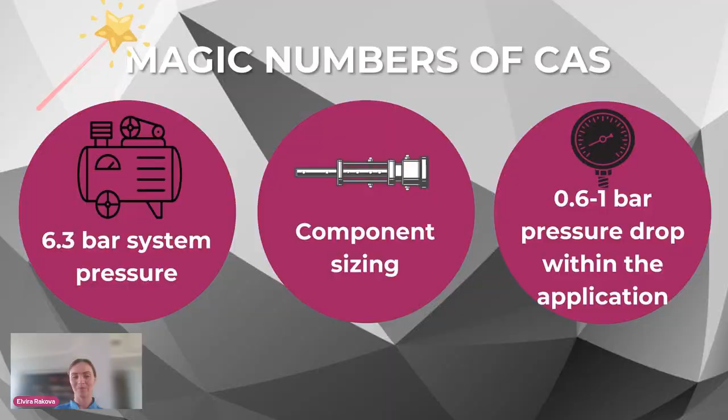Just to refresh a little bit the basics of compressed air: when we talk about, for example, 6 bar of compressed air, it means we take one volume of 1 cubic meter and put in there 6 times, 6 cubic meters. So this is 6 bar compressed air. We always work there with volumes and with pressure.

Why does this magic number matter, why does 6 bar matter, why does the sizing of components matter, or the pressure drop? Because this actually creates part of the energy consumption, or your energy bill that you pay, and also affects system performance. Our energy consumption depends on the pressure level that we supply to the system, plus the pressure drops that occur in the system, even if we have a perfect system, times the filling volume.

Filling volume is all the volume that we need to fill. It's the geometry of the cylinder, for example. It's all the dead volumes that we have, the flow in the application where we need the flows, all the tubing, and so on. So this is basically our system performance. We always work with pressure and with the filling volumes.

Since we don't work with temperatures there and we have a standard temperature, we likely ignore this factor in our energy consumption consideration. However, it has some impact, but not a big one.

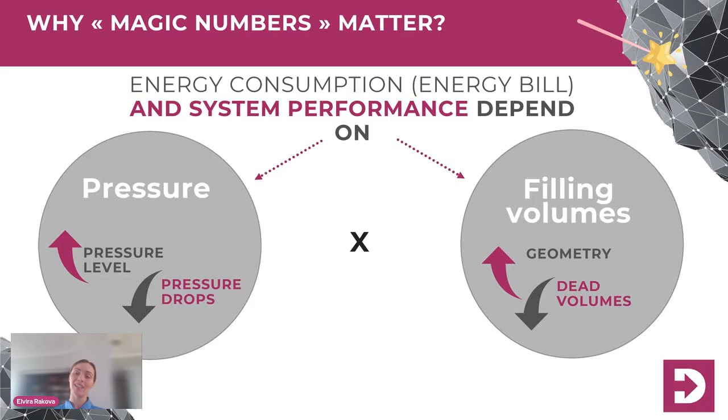The first magic number I would like to discuss and unveil today is the pressure level of the system, 6.3 bar. I put a magic ball here for a reason, because I was always asking why it is 6.3 bar. While working in the lab, every time I turned the pressure regulator to 6.3 bar, I was waiting for something to happen, because it's everywhere, it's written 6.3. Not 6, not 7, not 6.5. There is something mysterious in the 6.3 bar.

So how did I start my journey looking for the technical explanation of this? First, I did a questionnaire of the maintenance managers and also the suppliers of equipment, suppliers of compressors, auditors, and everyone confirmed this is the best practice, this is our baseline, this is the standard. Whenever a system would work under 7 or 8 bar, everyone would say we need to reduce it to 6.3 bar at the machine.

The next question about 6.3 bar, I asked the suppliers and auditors, and they also confirmed this is the best practice and recommended by manufacturers. And third, of course, I checked with manufacturers and they confirmed the same.

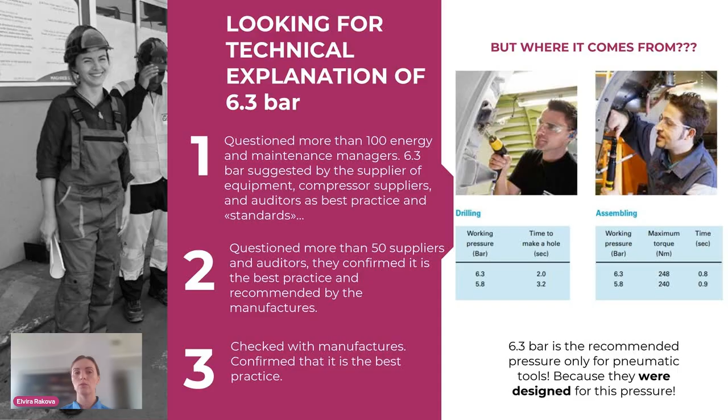So once again, we have here one certain application of compressed air, just for pneumatic tools, and they use 6.3 bar to perform it. Then they said you have pressure drops in the system, and maybe the compressor unit is at 7 bar. So my question was again, why were those systems actually designed for 6.3 bar? I'm waiting for the next slide to show you on the screen. Here it is, and here's another interesting historical background.

6.3 bar is 90 psi, because we use the SI system, right? In the US, for example, they would use 90 psi. 90 psi was chosen because it's a technically reasonable pressure that a compressor could supply, plus it's a pretty number. I've been told it's a pretty number, and if you translate this pretty number into bars, it's going to be 6.3 bar. This 6.3 bar was adopted in all countries, because this standard for those tools was first developed in the US. Then agree, it's a nice number, right, like 90, not too high, not too low, very pretty.

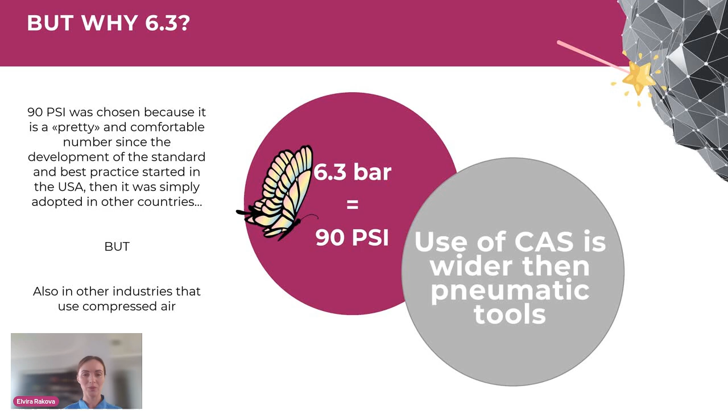Moreover, they were adopted not only in other countries but in other industries as well. So it means that the pneumatic tools, only for a few applications, this pressure level and standard, and this technical explanation, was also adopted in other industries.

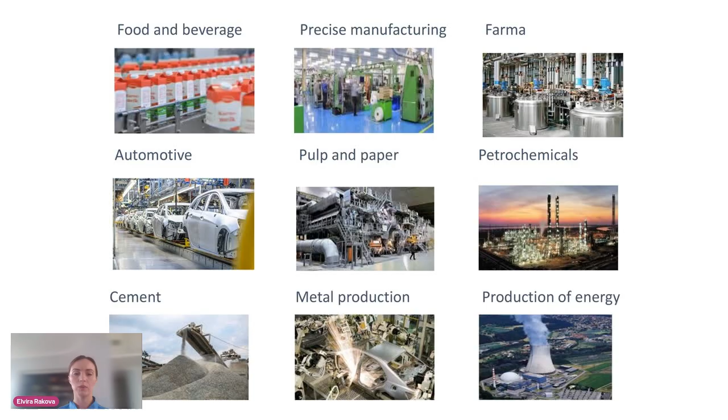But compressed air is more than just drilling and checking all these machine tools. We use pneumatics in food and beverage industry, in precise manufacturing, pharmaceuticals, automotive, pulp and paper, petrochemicals, cement industry, metal production, production of energy. I don't have all the applications here, but you probably know better than me. We also have woodworking machines, and various industries where we widely use compressed air, not only to fix holes with pneumatic tools. And those applications of compressed air can be technically divided into 4 types of application.

So the first type is, of course, the working air that we use in the automation. For each application, we have a certain equipment. So we have automation, we have the painting application for explosive areas. This is what we call working air. And there we have certain tools, certain equipment and components. We also use it as active air for material transport and also for bearings.

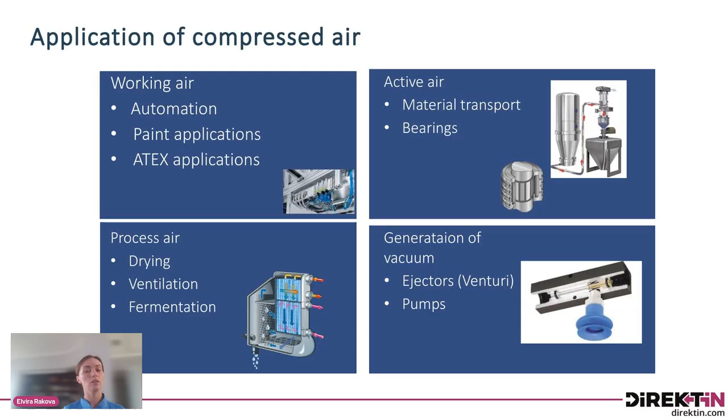In the process air, for example in the cement, in the chemical industry, for drying, for ventilation, for fermentation, and we also use it in the vacuum. So we can use it as ejectors, or we can use it as vacuum pumps.

So here we are actually beyond those drilling and assembling requirements or standards that were developed and adopted so many years ago. If we go a little bit backwards and question ourselves: do we actually need 6.3 bar at all for our application? Do we need this pressure level? Do we need pressure at all? Or maybe we need a high flow there? So those are the questions that I would like to discuss with you today.

I want to show you that there are standard ways to optimize compressed air systems nowadays. However, we need to follow better practices, and we need to follow a new way of thinking in the design of compressed air systems, as well as more efficient technology.

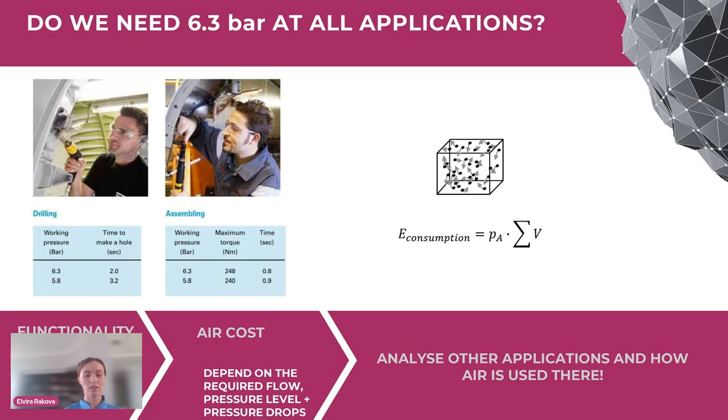So let's think together. We have the application of 6.3 bar for assembling, but what if we follow the same logic and go to all other applications that we have? We see, do we actually need those pressure levels, or what do we actually need for our compressed air system there? Let's go ahead and see how air is used beyond those applications.

Today, I would like to focus on just a few applications. This is mostly used in the working air - so basically the first type of application that I showed you, and also the vacuum. But today let's talk about the first step, the working air.

In the working air, we have a few things. We need to perform transformation of pneumatic energy into mechanical energy of moving mass. So basically it's the cylinder. We have air somewhere, we push the piston, and then we have something moving, or we perform the force, or we use it in press applications. This is one of the most standard applications of compressed air, right? Standard pneumatics.

What else can we use it for? We can use it for blowing. So basically we use this pneumatic energy as the kinetic energy of the flow for cleaning or blowing applications, for transport, a lot of things. Basically it's also used in chemical and cement production, in various things. So there we need the flow. And another thing is that we use those...

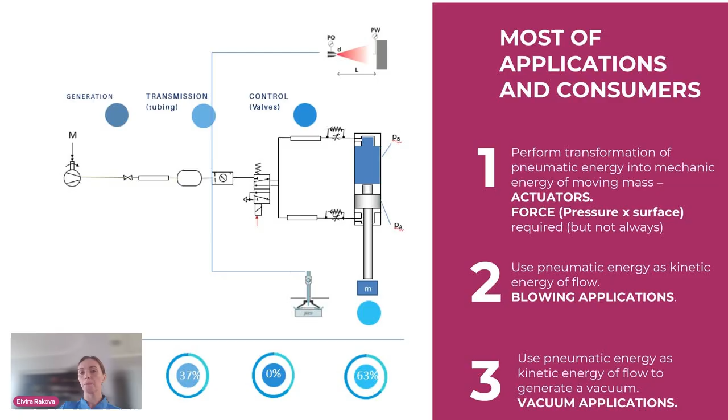So here we have the volume - it's the filling volume of the cylinder, of the tubes between cylinder and valve. We have the volume to blow something, to clean, for example. We have the vacuum to create this vacuum there. And those are consumers - the consumers are our actuators. It's our application of those pneumatic systems.

But the question is, do we actually need technically those 6 bar at each consumer? Can we adapt it, and why does it matter? Now you see that there are practices that have been used in the past, and now we don't have to apply the same practices for those tools where a certain torque is required. Here we need a certain force. And this magic number matters on all levels and on all applications.

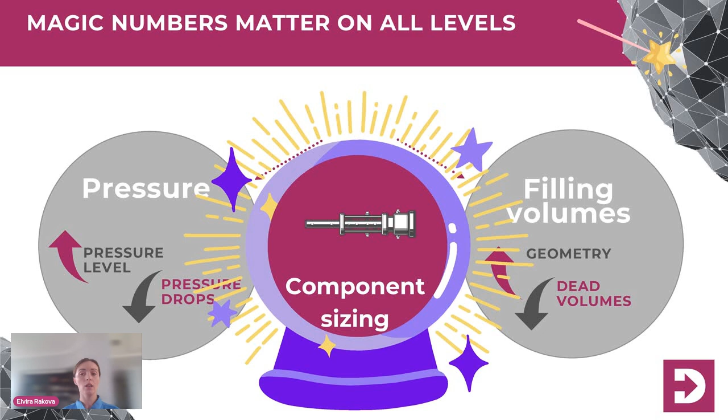First of all, of course, it's important to see that the pressure level contributes to energy consumption, as well as pressure drops, filling of the geometry and the dead volumes. It all comes to the fact that we need to size our components correctly. And this, for example, we can see in the example of the cylinder.

There are 3 steps for how to choose a cylinder, 3 standard steps. First of all, the choice of the cylinder starts with the identification of required task parameters, right? So we have the machine, for example a press machine. We have a pneumatic press there.

We need to understand the force that we require for this application, the velocity, and positioning. There are other dynamic factors, acceleration maybe. There are few things that are important, but the most important is usually force and velocity.

Then we calculate the required cylinder diameter under standard system pressure. You see here on the right-hand side, this is the catalog of the manufacturer, that from every manufacturer you can find it, and it's again standardized. You see this pressure for determining piston force, 6.3 bar. It means that it was calculated and tested by the manufacturer at this pressure. So it's again our magic number here.

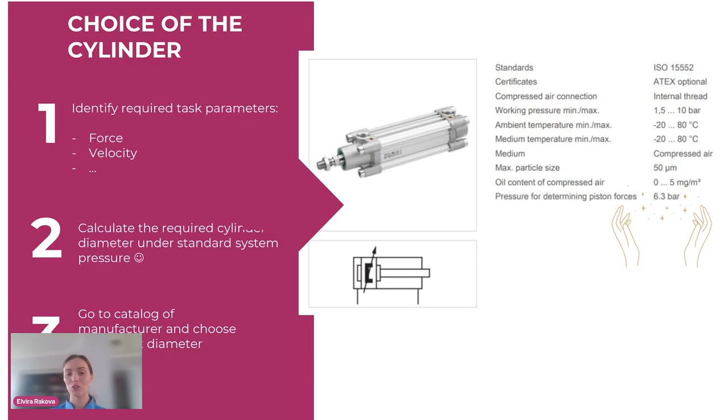And then we need to go to the catalog of the supplier. For example, if we chose a calculated cylinder diameter of 26 millimeters that would require for this task, then we need to choose cylinder 32 from our standard catalog, right? And let's assume right now that we cannot reduce this pressure, that now the pressure is set standard because the supplier of the component told us that this calculation was done under 6.3 bar, and we can choose cylinder only under these circumstances, under these conditions.

And this is a very common case in standard pneumatics - not the consumption, but oversizing the cylinder is common. So, for example, we chose the 32, but then, okay, maybe we need to have more safety there, and the bigger the safer it is, probably, or faster. This kind of gives the feeling that it can save the application.

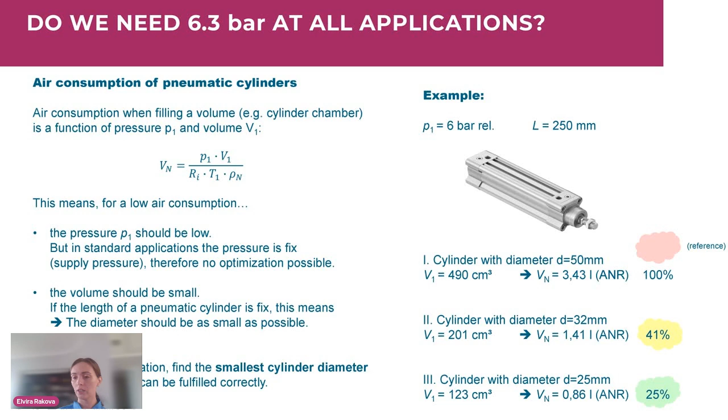You understand, of course, the logic. We're increasing volume here, and we cannot decrease the pressure level here, because this is the standard thing. It always has been done like this, and this practice of this pressure level was adopted. So it means that to reduce energy consumption, we need to size correctly those cylinders. We need to calculate, we need to not oversize it, and we always need to pay attention to this.

I want to show you now the standard cylinder sizing and this sizing dilemma, basically, right? So you see here the numbers that are standardized nowadays. We have here - I didn't show the smaller ones - but we have from 32 to 125. And then we have certain gaps: 40, 50, 63, 80, 100, 125.

And each of the piston force and the 6.3 bar contributes or creates the extracting force. So we have retracting, extracting force, and this is usually the criteria how the machine designer, machine builder, or system supplier chooses the cylinder. As I said before, I calculated 49, I choose 50, okay?

But look at this gap between the force. The gap is actually huge. So between 50 and 63 millimeters, it's 1,200 Newton. The next one is 1,900. Next one is 3,000. And another one is already 5,000. Another one is already 8,000.

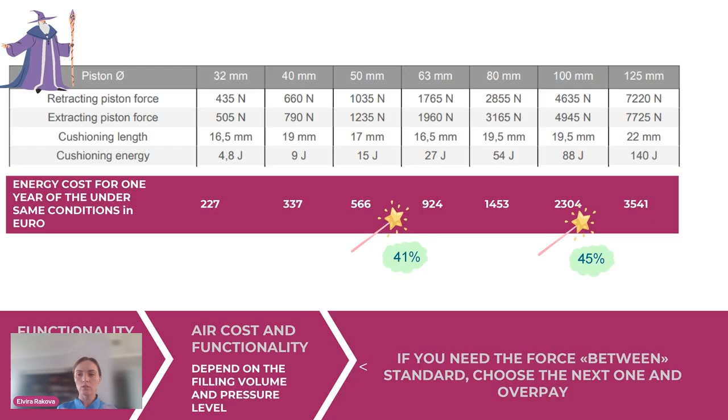And the problem is that standard pneumatics was actually not designed to be efficient, because this gap doesn't make sense. It doesn't make any technical sense. It should be opposite - it should be a bigger gap in the smaller diameters and a smaller gap in the bigger diameters, right? But where are those numbers coming from?

In the 1800s, the French engineer Charles Renard created the Renard number system. This is the geometric progression that was adopted by the International Standardization Organization for various industries, including pneumatics. You can find it in electronics, in chemistry, in many industries.

It's a very good initiative, right? Because we need to have standardized sizing. We have to have standards to be able to communicate information to customers, to be able to optimize. I mean, it is essential and very important.

However, it was also applied for the cylinder bore size. And if you just multiply the current bore size by 1.259, you get the next cylinder size. So good news, you don't have to remember this anymore, what is the standard cylinder size. You simply just multiply it.

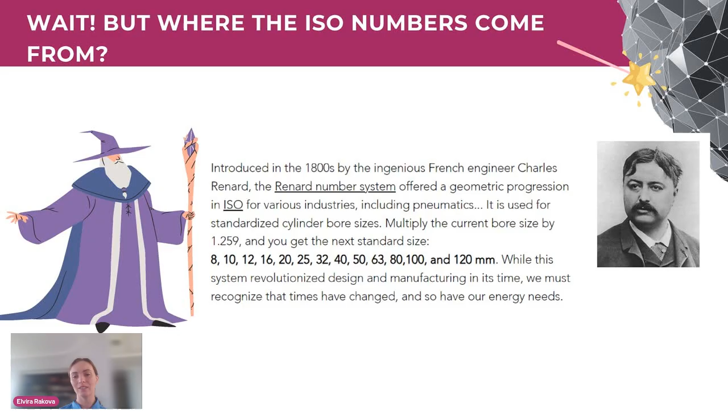But the system was adopted in the 19th century, and of course it helped and revolutionized the design and manufacturing of that time. However, I think nowadays for the 21st century, for 2023, it's a little bit old, and we are under pressure for energy efficient solutions. The question is how we can provide energy efficient solutions when we still use this. We have this standard of standard cylinders, and we cannot change it because it's already best practice.

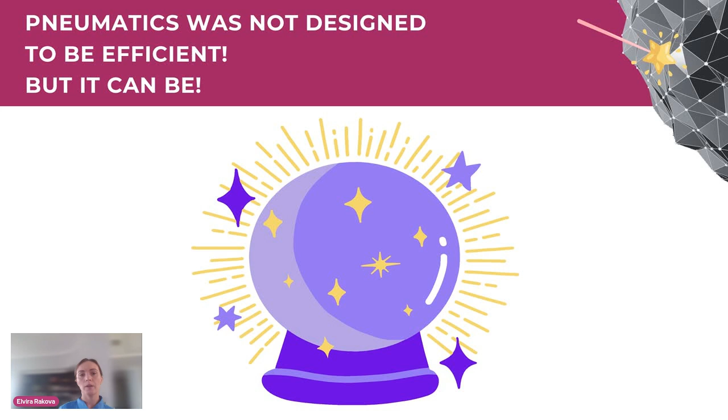And I think that pneumatic systems can be efficient, and I'm sure about this. It's not only my opinion, but the opinion of various manufacturers, system suppliers, and also machine builders, that there are nowadays slowly coming to market the best practices on optimizing and reducing the consumption of the application.

So once again, I remind you, and I will always remind you, we have pressure and filling volumes. So we can reduce the pressure level. Yes, we can reduce the pressure level at the compressor, and we can size the cylinder according to the pressure level that you have. It doesn't have to be 6.3 bar. As you could see, you could choose a bigger cylinder under the lower pressure level.

You can also reduce the pressure drops. It doesn't have to be half a bar or 1 bar, that's too much. And if you hear from manufacturers that a pressure fluctuation of 1 bar is too much, that's not right, because physically you always have pressure drops, but not as high as this one.

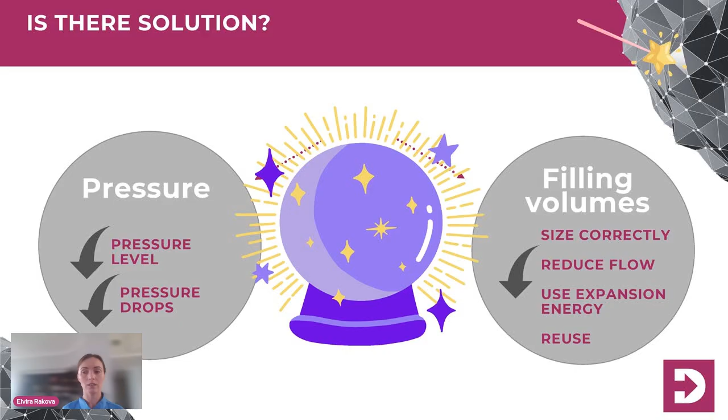And of course, the filling volumes, so you can use them correctly, you can size it correctly, you can reduce the flow, you can reduce, for example, also the dead volumes. So when we always play with these two things, we always need to find a balance for our functionality, for our application, and the pressure level, and also the flow.

And here, just one of the things, this, for example, was developed by the Artema organization. So I'm using the table from them about the various energy saving measures at the levels of the actuators, distribution valves, distribution line, and also filter regulators. On purpose here, as you see, I don't touch the compressor, because we're not talking about the generation, we're talking about how the air is used.

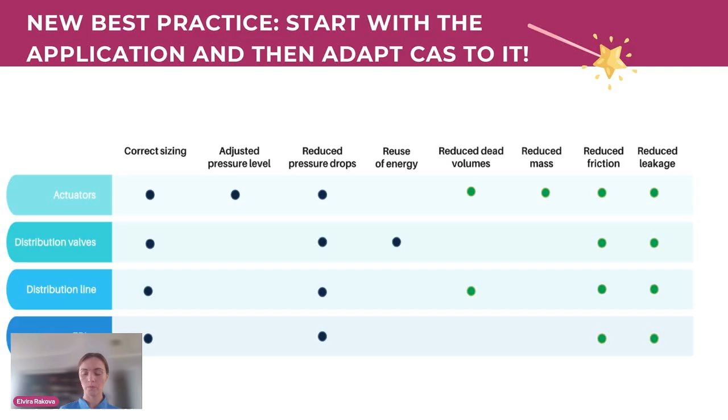And well, my main idea is to show that first we need to start from the application. So we need to reduce the consumption application and ask ourselves, why do I have this pressure level? Do I need this pressure level here? Do I need this cylinder actuator? Do I actually need this technology? Maybe it's not a pneumatic cylinder that has to be used there, but maybe it's an electric actuator. There are various factors that have to be considered.

Today, I wouldn't like to go into the details about cylinder sizing, but you can find those tutorials on our YouTube channel, called No Boring Pneumatics. So I hope you can have also some interesting insights there and learn more things about new technologies that are already available on the market.

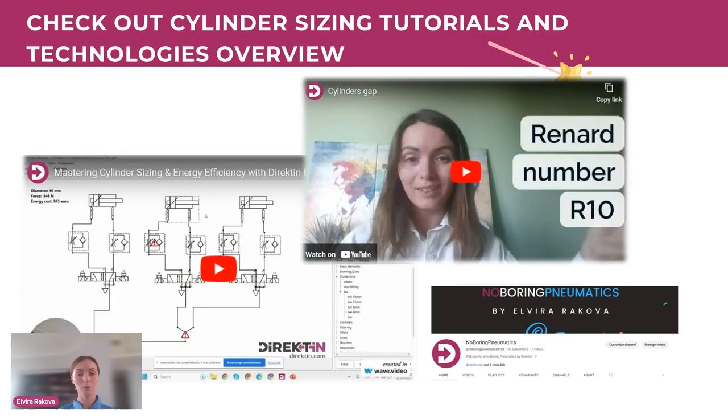And what I wanted also to tell you is that there are various technologies that provide, for example, the cutting of the volume, the use of expansion energy of compressed air inside the cylinder. It can also reuse the energy. It can also reduce the pressure for the return stroke. So it's not only this old sizing with the Renard number available nowadays in the market. There are various technologies that can be nowadays implemented, and they work totally fine.

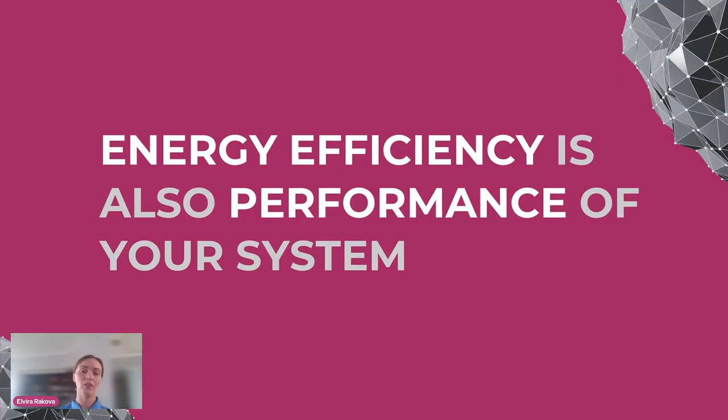Another thing that is very important is that energy efficiency is also performance of your system. So what does it mean? It doesn't mean that it's always a balance, that either my system is faster and better, or more energy efficient, or maybe it consumes more, or it consumes less but it loses in performance.

In pneumatics it doesn't work like this. Energy efficiency in pneumatics, in compressed air, is always the result of a correctly sized system. It's very simple: if your system is sized correctly, if there are no problems in the application sense, you have enough force in the cylinder, enough blowing force, enough speed, and no leak problems inside the sealing of the cylinder. I'm going into details now, but this is a very important thing to remember. It is always the result.

Another thing I want to talk about, the third magic number, is the pressure drop within the application. It's considered that 1 bar pressure fluctuation is fine. In my opinion, we need to reconsider this, but also in the opinion of physics, thermodynamics, and real best practice that we see in the industrial sector, it's a very high pressure drop within the application, within the machine. I'd like to share with you a real use case to show how considering and optimizing the application first is very important.

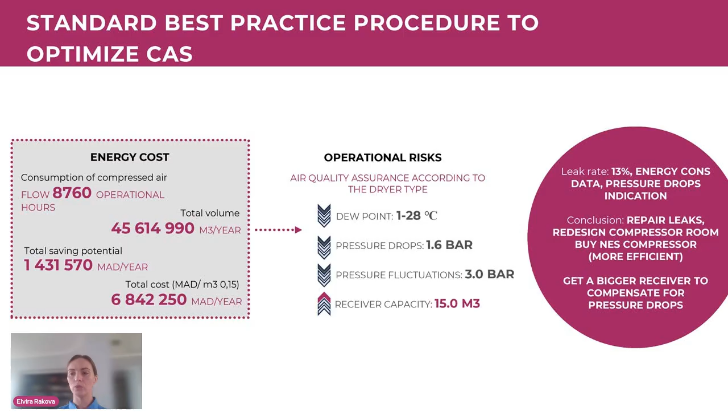And of course, when we see in the closed box only the compressed air system without the application, we make one conclusion: that we need to repair leaks, we need to redesign the compressor room, we need to buy a more efficient compressor, maybe we need to compensate those pressure drops - not to have them, maybe we need a big receiver.

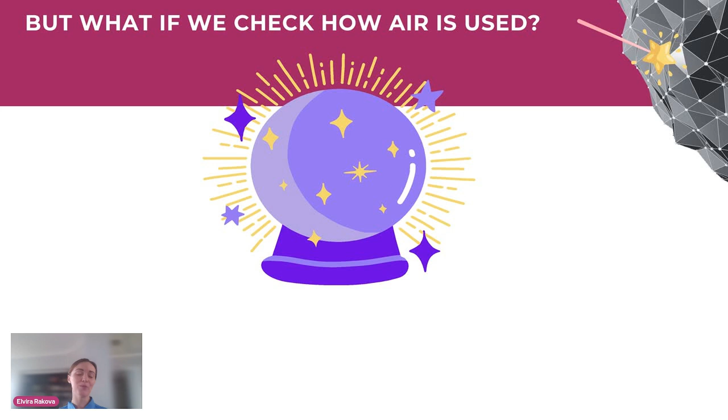So the information that we got from the previous audit - and because I think compressed air is fascinating, very interesting - I'll use my magic tricks today in the slides, as we asked our magic ball about the application. So what is actually the application and how is air used? What are the magic numbers of this application, why does it cause such a high pressure drop, and what is this? So in this factory, the client...

replaced old technology with air knives. So basically he uses a flow application, right? Before I showed you we can have cylinders, vacuum, flow applications - in this case it was a flow application to clean the surface. So we did the model of the projected application, just the application, because they changed it. The most important thing for the customer was what is the blowing force and what is the consumption, or the flow rate, in cubic meters per hour. So this is basically the requirement, how the air is used.

The air was used like this: it has to provide a blowing force of 120 Newton with a certain 700 cubic meters per hour. So we built our model correlated with the technical standards, and there are some little flaws in this application because one piece was changed, another one not changed, and so on.

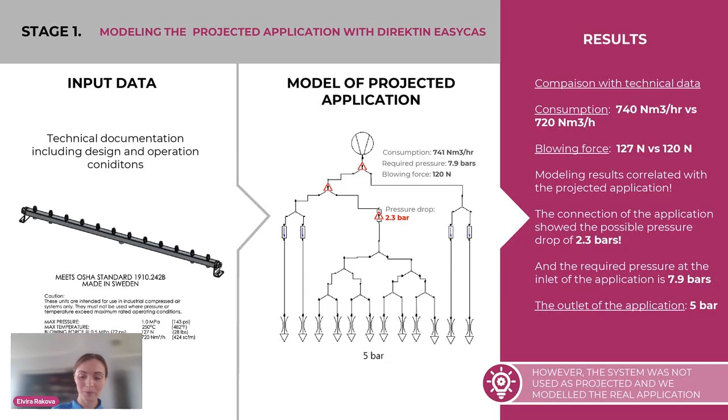So there was the pressure drop within the application, the pressure fluctuation of 2.3 bar. Of course this was not normal, the customer was not satisfied. And if we calculate back, the required pressure of the compressor was 7.9 bar - not the magic number of 7. However, the system didn't work with this blowing force and this pressure, because we saw on the manometer the flow was very low - it was okay, but sometimes not okay.

So we saw that it was not a real application. And if we calculate the real application and model it, we see that the required pressure at the outlet was 2.2 bar. The actual blowing force during this operation was 70 Newton instead of the projected one, and the consumption, of course, was lower.

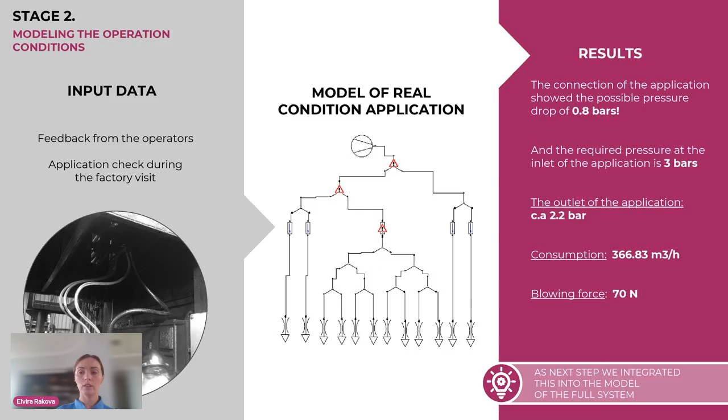And the required pressure was 3 bar with a drop of 0.8 bar. So the next step is, of course, to take this application. And after understanding what the application does and what the process actually requires, we always need to take the full holistic picture and put this application inside the compressed air system and understand how everything works together, how everything correlates together.

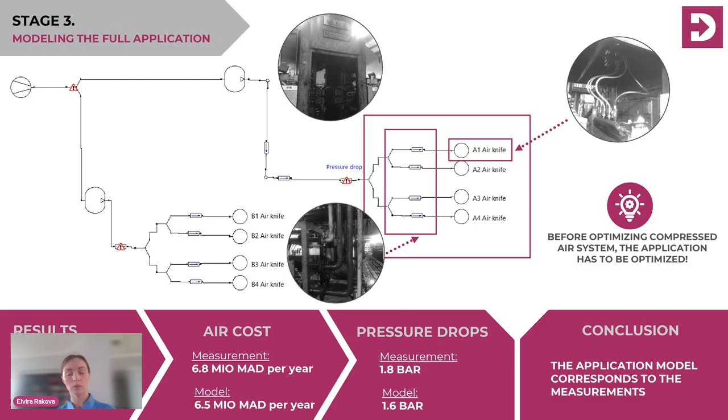So the results were following that. It's true, the measurement confirmed that this was the situation on those air knives, that the pressure was low and the flow rate was also lower than projected. The air cost was more or less the same, and the pressure drop around 1.6, 1.8 bar. So the application model corresponded, but of course...

The customer wanted to have a more efficient component, more efficient application with a higher blowing force and also better performance of the system. And here comes this question: but was the compressed air system actually ready for this integration? Because in our head, we have the machine and we have the pipe, and somewhere we have the compressor, maybe 2 kilometers away or 1 kilometer away from this room. And it looks like a very simple system that should work and should adapt into this application. However, it's not like this.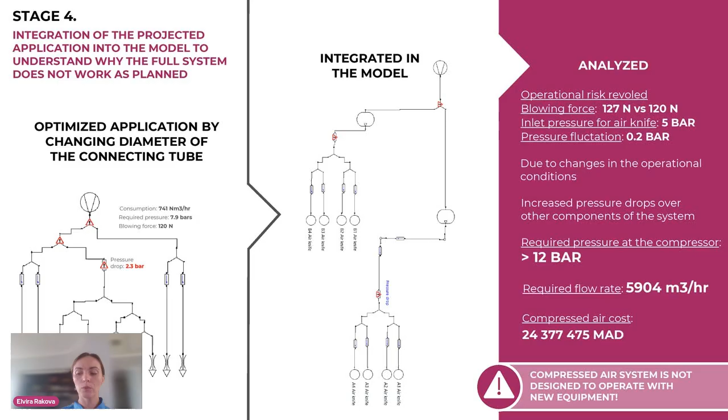And the conclusion was that the system was simply not designed for this. It was not designed for this because this new efficient component, that consumes less and gives more, required a higher mass flow rate. And this was causing the higher pressure drop in the full system.

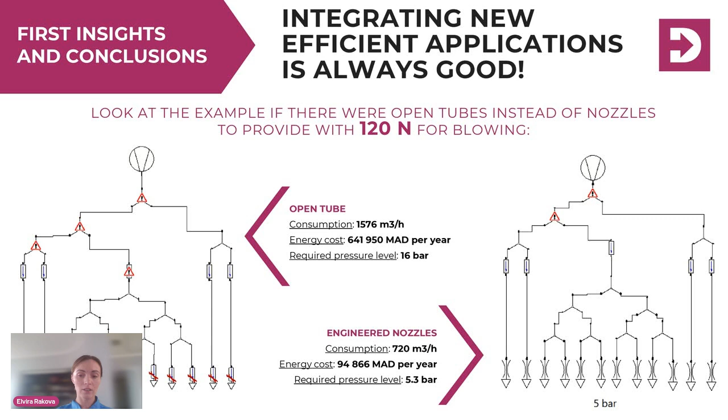And if we go back in the logic of changing something in our system, we can say that integrating new efficient applications is always a good idea, is always good. In this case, the open piping was replaced by nozzles, and of course it's engineered - great nozzles that should work and should have better performance. However, the system that already existed before was not able to operate with these conditions. So the system compatibility has to be checked always first.

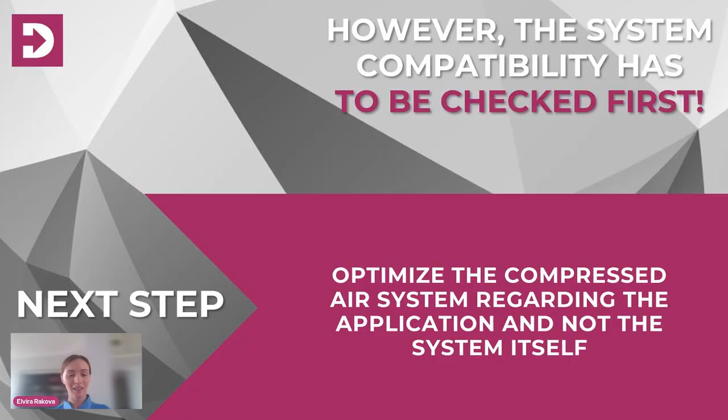So, optimize the compressed air system. And what I'm always telling people: we need to optimize the compressed air system regarding the application, not the system itself. We don't fix the compressed air system just to fix it - of course we need to fix it, that's the next step - but first we need to understand how it is used and optimize this application. We're not creating a compressed air system for the sake of the compressed air system. We're creating it to be able to perform something, to operate, right?

To have the forces at the end, to have the certain flows at the end for our application. We don't buy air, we buy the application. And this is very important. And here I will not bother you with the numbers, but just to tell you, there are various options to do this.

For example, in this case, we can keep the same functionality that the customer wanted with the reduced pressure fluctuation, and the required pressure level - maybe it's a magic 6.2 bar, maybe it's really a magic number. So in this project, it was suggested like this. But the air costs were higher than before.

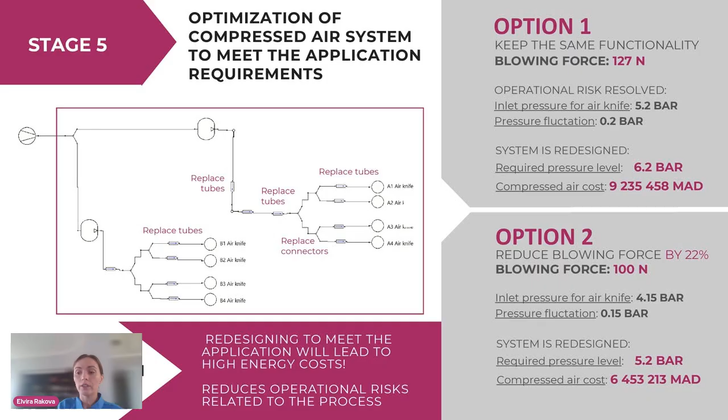In the second option, maybe we can reduce a little bit the functionality, in the sense that - you saw the cylinders are oversized, right? Sometimes we have 3,000 Newton where maybe we don't need it. So sometimes we should question the supplier of the machine: do we need this force? Do we need this flow here at all, to adapt our compressed air system? For example, if we reduce blowing force by 22%, we needed lower pressure for the air knife, and the system redesign was now 5.2 bar, with compressed air costs that were lower.

And here now it's another tricky question. So you see, we always need to dive deeper into the application and be annoying, and understand why it is so, why I need this force.

From our experience, the application could be adjusted for low pressure for blowing force, but a high flow rate. So here's the tricky thing: we have various applications for compressed air, and two different applications for blowing. For cleaning, we need high flow but low pressure to blow large surfaces. For precise cleaning, we need high blowing force, high pressure, and low flow.

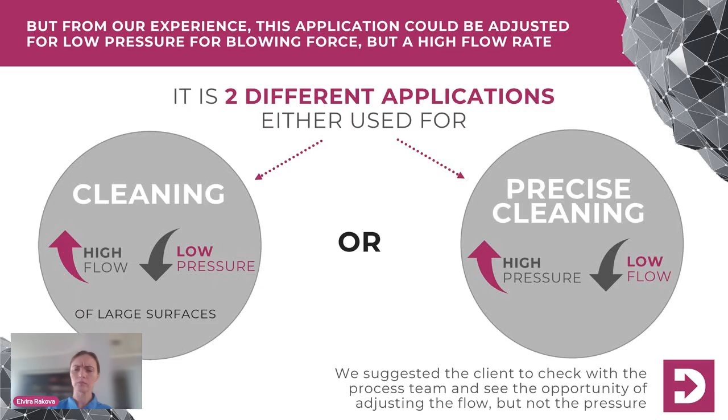Most of the time it's a tricky thing to comprehend in one, because we have certain ways of applying compressed air. We have a compressor at 7 bar, 6.3 bar, and it just serves all the applications. But if we go a little deeper and understand this, sometimes maybe we don't even need it, because our requirements are different, or the process team doesn't need this.

So it's always very important to understand first how the air is used, and sometimes we don't even need compressed air at all. We always need to understand the life cycle cost analysis, the energy cost, and how our process will change. Option 3, for example, was okay, let's leave it the way it is.

We need to change something there, of course. Behind these options there are modifications of the system, right? We leave this blowing force as is, and we leave the energy cost very low now. But option number 4, a philosophical and technical question, do we need this at all?

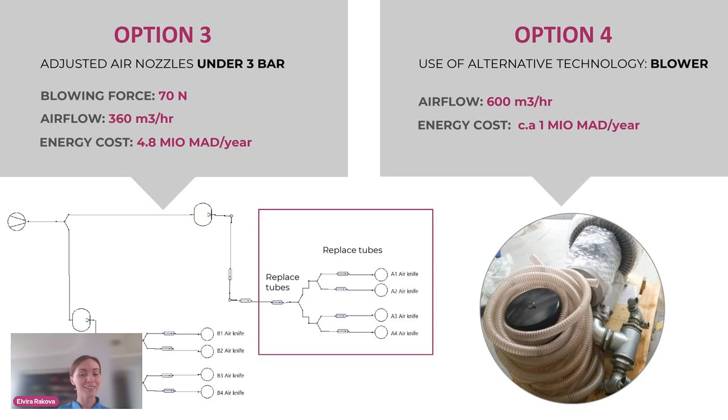Maybe we can use an alternative technology, like a small blower that provides the flow here. It doesn't create any force, it creates 2.5 bar of pressure, right? We don't need a compressor there at all. So we remove the compressed air system entirely and just put a small blower that works only for this application.

With those kinds of questions, we can't say something is right or wrong. We cannot just say remove all compressed air and put electric drives, because it doesn't work like this. There are applications where pneumatics is way better than electrics, and applications where electrics is better than pneumatics.

Better, not because it's shinier and fancier. It's better because we took the application, considered the dynamic functional characteristics already mentioned, and the energy cost—we consider the full life cycle cost with maintenance and investment.

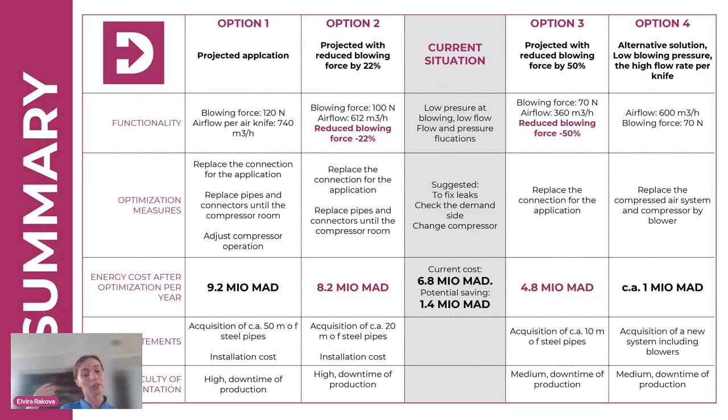We saw the amortization curve, and only after that can we take a decision on which application to use there. Then, when we have several options, we understand we can choose the most optimal application for this, not the one that shines in the catalog. For example, here you see there are 4 options, and we first ask the question of functionality, and after functionality, we go back and adapt the compressed air system.

So we don't design the compressed air system first and then put applications inside that use it. We design the application first and then adapt the system. Maybe it's 2 compressors, maybe 3, maybe 1 compressor and 1 booster—who knows? We always need to understand what our requirement is.

So questioning back the design, as I said—design or check your application first. Your system doesn't have to work at 6.3 bar unless it's for tools. Component sizing doesn't have to use standard ISO components, or maybe it does. It doesn't have to be at a pressure level of 6 bar for those components, or maybe it is. There can be other efficient technologies there, right?

The market is now full of various efficient technologies, or maybe you just adjust the pressure reducer for the return stroke of the cylinder. Your pressure drop doesn't have to be 1 bar—this is within the application. It can be 1 bar if you have a big system up to the compressor, but it doesn't have to be that way.

There are physical conditions and calculations based on standards and tests that help you calculate the pressure drop that should theoretically be in your system. Plus, of course, we have some safety factors, but 0.2 to 0.3 bar is a normal pressure drop within the pneumatic system, not 1 bar, not a fluctuation of half a bar. And then, once you choose your application, adjust your compressed air system to it.

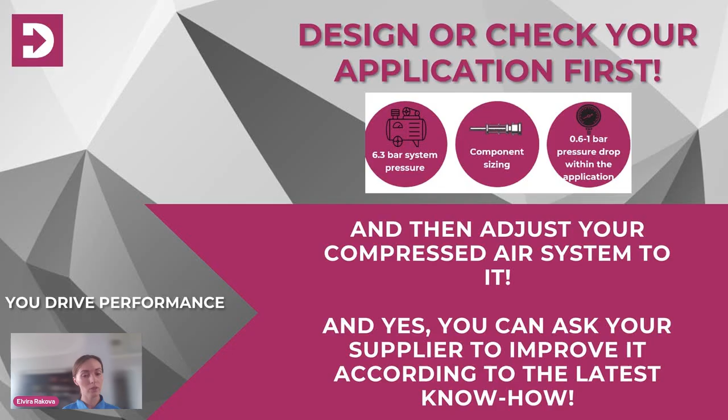If there are energy managers or end users watching this, you drive the performance. You can go to your system manufacturer and say, I want to optimize it, reduce the pressure level because it's very high for me, or use multi-level system pressure. Reduce the pressure drops for me. Show me what other efficient components you put here. Are you sure you didn't oversize those cylinders? These are things that come from energy managers and maintenance managers.

So you see the state of the art of how pneumatics is designed. It's not designed to be efficient. And I showed you today, in just two minutes, the magic numbers that we think are best practice.

One real number, a magic number that makes technical and physical sense, is the critical pressure level at the ideal nozzle, which is 0.528. Then we have the Reynolds number and other numbers, but they're proven in the laboratory—it's not just that someone said it's a beautiful number, so let's now have everyone use it for all applications.

If we go a little bit into the philosophical question, this is what I call the implementation uncertainty energy efficiency curve. We have various stakeholders in this game. We have suppliers of pneumatic components that already have efficient technologies. We have machine builders willing to reduce their energy consumption and make their machine better. And we have end users who are, of course, interested in better performance and lower energy consumption.

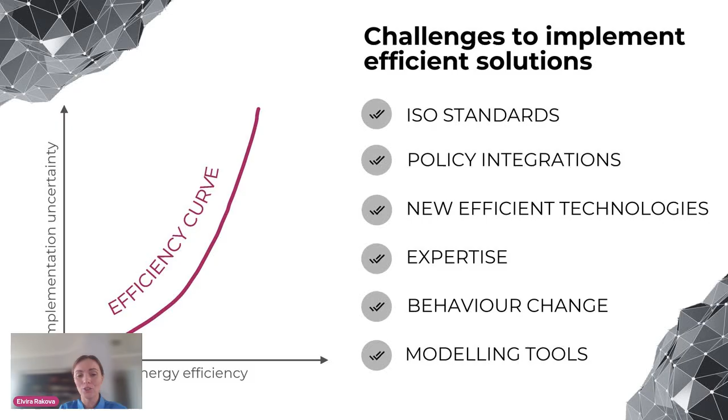We have experts, we have expertise. We need some behavioral change, to be a little more open-minded about different applications and to have this information. And we also need the modeling tools.

And today I would like to invite you to the AirG movement. So what is this? AirG movement is a very new thing, we're launching it in October, and you can sign up for it. It's a platform—AirG comes from Air and Energy. We will have collaborative software there for efficient design of compressed air systems. It's free of charge, you can already download it and use it. It's powered by Direktin, where we developed it. But we realized we need more personal touch there. We need people—and I meet so many brilliant experts with amazing technologies.

People write me, look, I developed this thing and it saves 70%. And what we want to do there is have a common space, not only for suppliers of efficient components and experts, but also end users. Because when we go to end users, someone asked me, okay, we need to optimize this, but can you also monitor this, or can you do leak detection or some other thing?

So there is a need, not only on the informative and educational side of this, but I think there is a need on the collaboration side. We would like to invite all the experts and also people that use compressed air, or are just curious about it, or maybe know some other magic numbers. So besides the software, we're going to have all the energy efficient components available on the market integrated inside it.